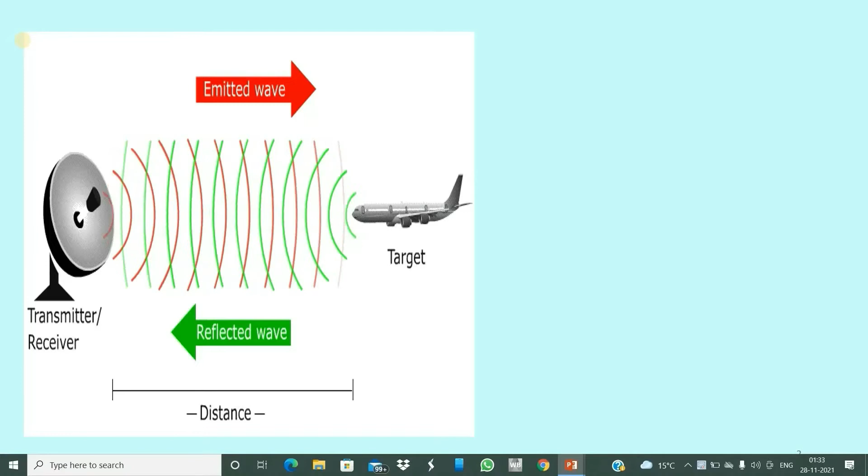I am going to present my paper in front of you on the title Review on Recent Advancement in Radar Absorbing Material for Stealth Technology. Stealth is a word which attracts scientists and engineers from all over the world. Let us understand what is stealth technology. People are having a misunderstanding about stealth, that it is a technology that makes the object invisible, but it is not so.

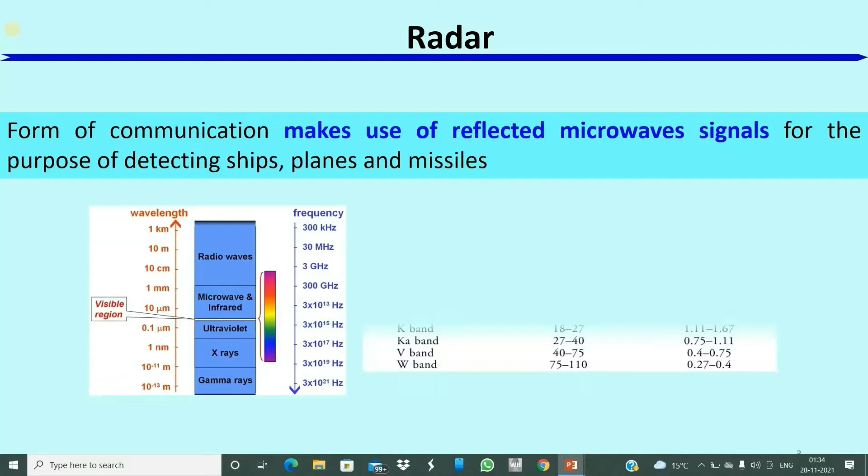To understand the technology, first we will know about the radar. Radar is a form of communication that makes use of reflected microwave signals for the purpose of detecting ships, planes, missiles, etc. Mostly for detecting purposes, X-band is commonly used, which has a frequency range between 8 to 12 GHz and a shorter wavelength between 2.5 to 3.75 centimeters.

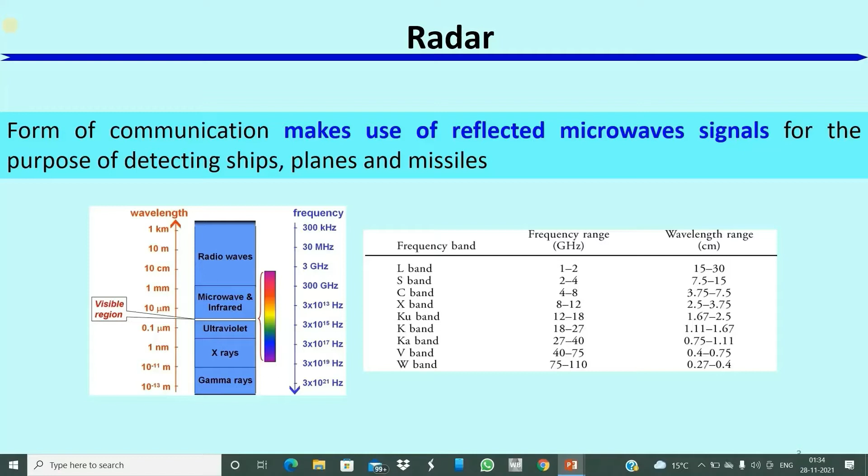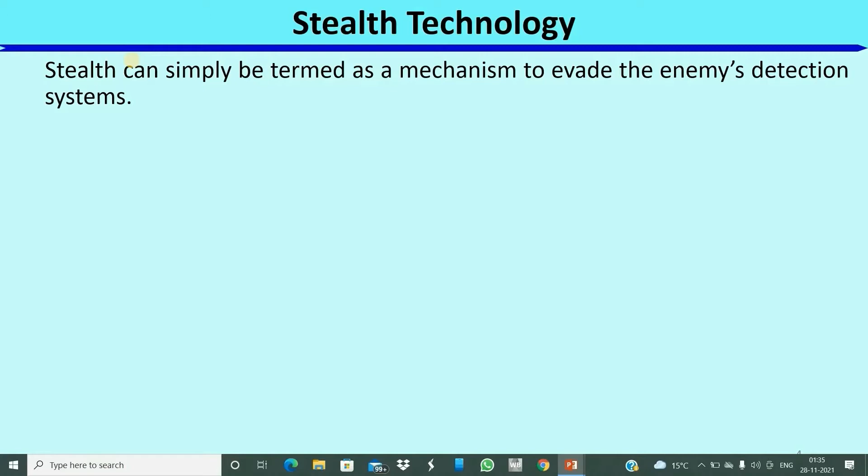Stealth technology can be termed as a mechanism to evade the enemy's detection systems. For an aircraft to be a stealth aircraft, it should absorb or reflect waves at different angles from the radar system. As we can see here, from the antenna, radar waves are coming and striking the aircraft, and after striking the surface of the aircraft, they are reflecting back to the radar system. But in a stealth aircraft, radar waves coming out from the antenna are not reflected back to the antenna radar system, but are reflected in a different direction.

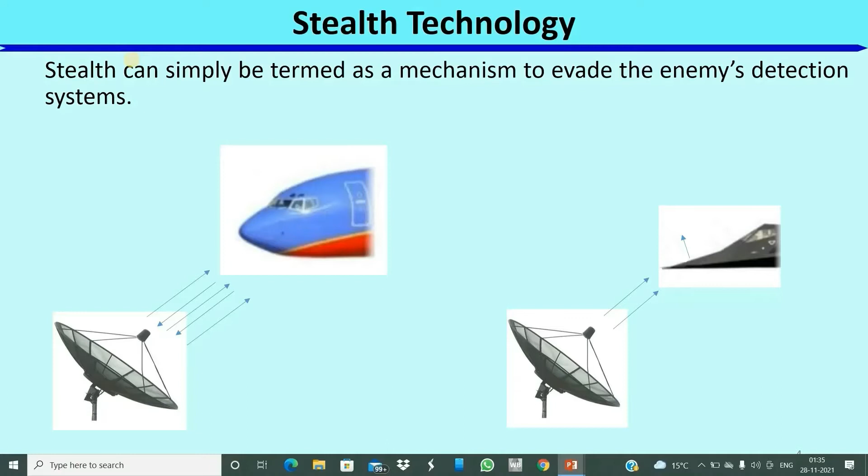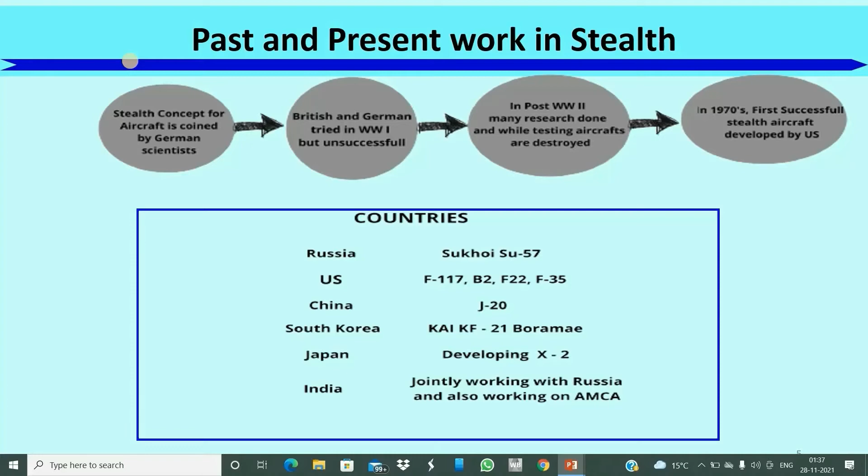But the first success we got in the 1970s, which was developed by the US. In 1970, the US developed the F-117, and many other countries have also developed stealth aircraft, such as Russia and China. South Korea, Japan and India are in the developing stage of stealth aircraft. India is jointly working with Russia and also working on AMCA.

In between the resistive layer and the conductive layer, dielectric material is kept, which absorbs the power of the wave. By absorbing, the power is reduced, making the waves weaker and weaker, and it is converted into the form of heat. The size of the dielectric material is determined by lambda by 4, where lambda is the wavelength of the band used for detecting.

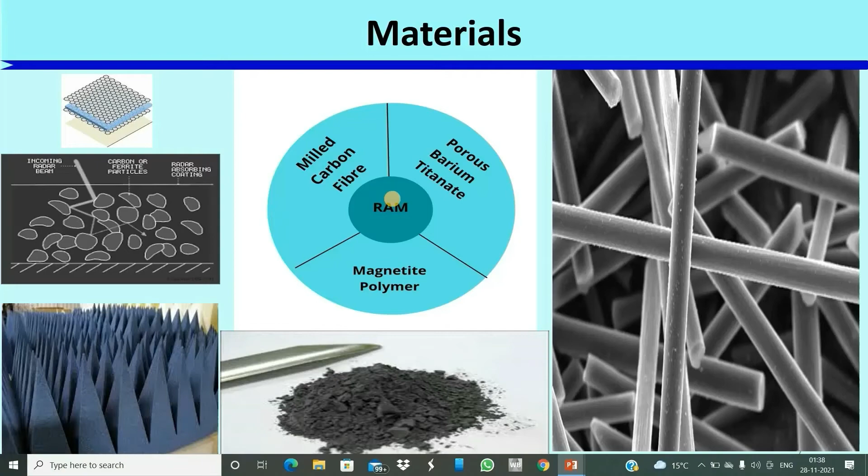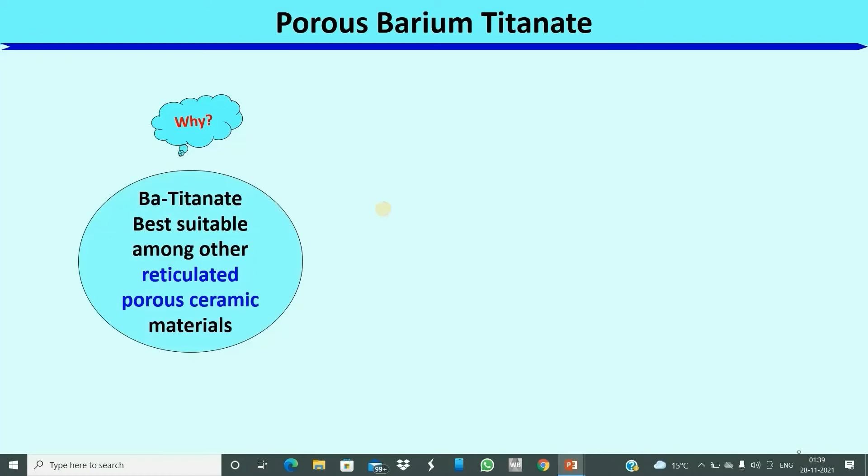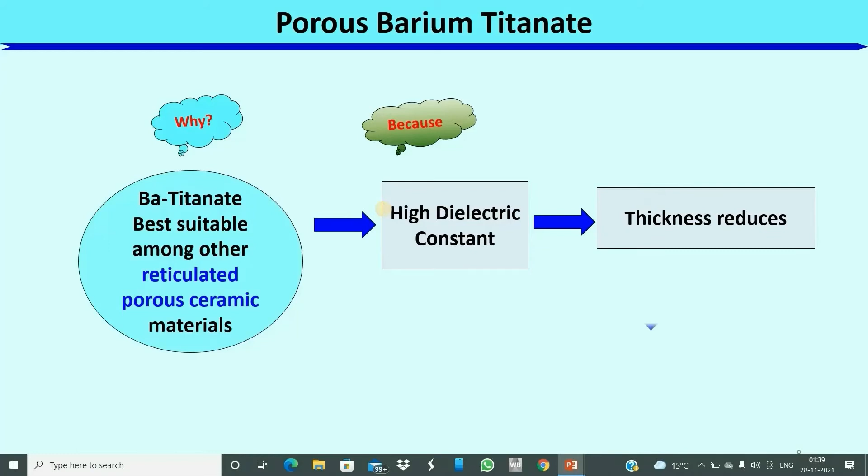For this study, we have chosen three materials: milled carbon fibers, porous barium titanate, and magnetite polymer. Now let's understand them one by one. First is the porous barium titanate. It is best suited among other reticulated porous ceramic materials because it has a high dielectric constant, so thickness is reduced. So at the minimum thickness, maximum reflection losses occur among other reticulated porous ceramics. Also, by having a high dielectric constant, the weight is reduced, which makes it the perfect material for stealth aircraft application.

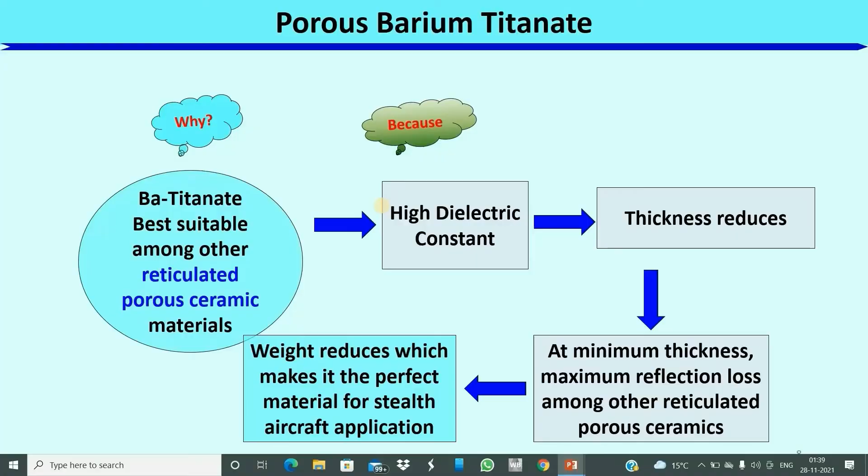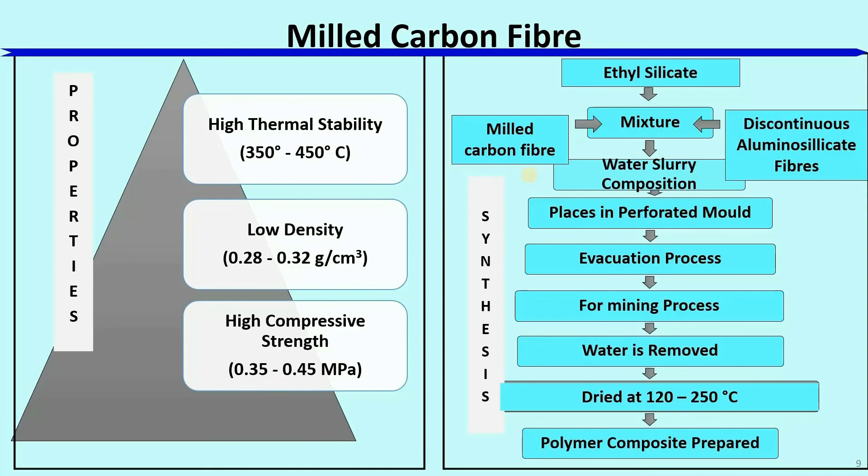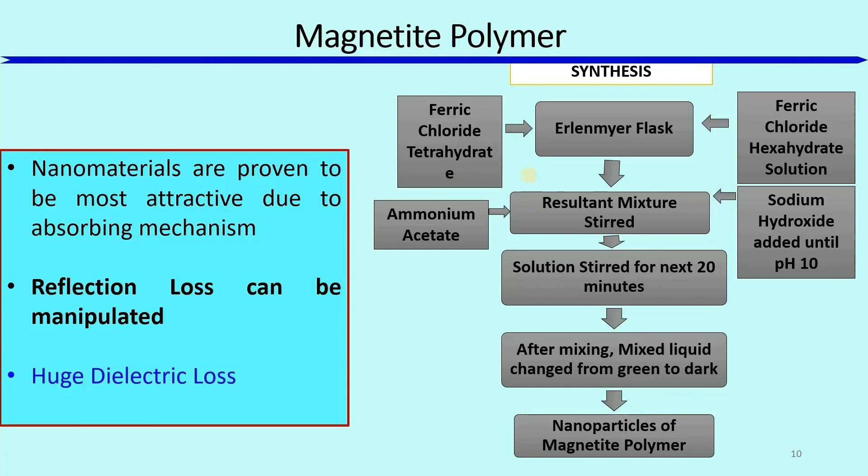Our objective in presenting this review is to acquire knowledge about RAM, how RAM makes the aircraft less visible to enemies, and what are the different materials which can be used as RAM.